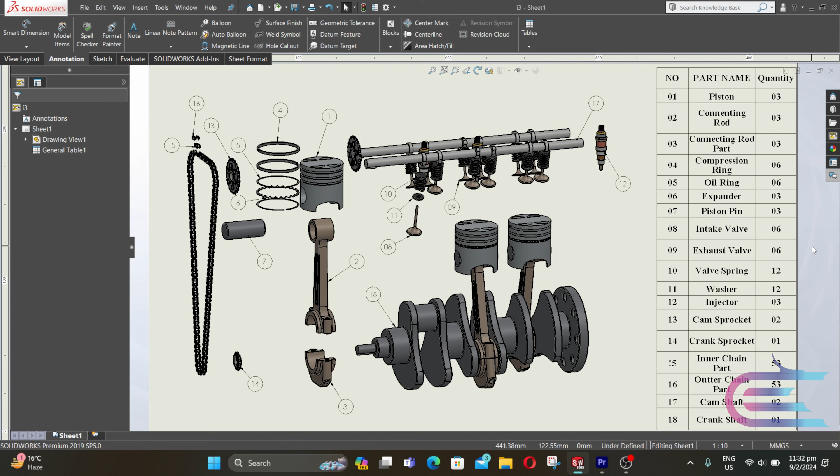Let's start. From File, select New, then select Assemble, then click OK. Select I3 crankshaft, then select Open. Place the crankshaft at the middle.

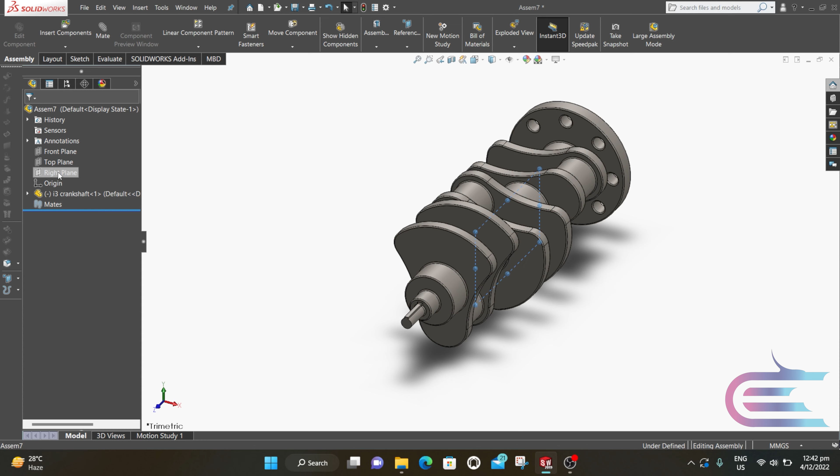Right-click over the body and select Float. Right-click over the right plane and select Normal to. Select Layout and select Center Line. Draw a vertical and horizontal center line connecting the origin point.

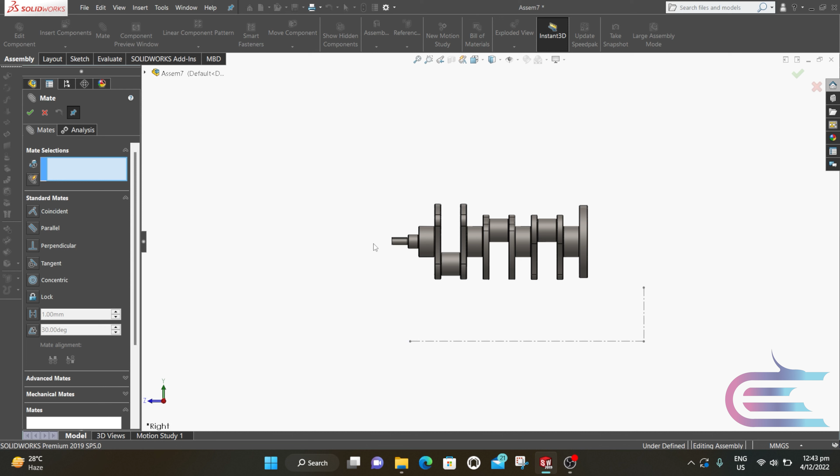Now exit the sketch. Go to Assemble and select Mate. Select this cylindrical profile and this line. Select Concentric, then click OK.

Now select this surface and this vertical center line. Select Coincident and click OK. Now this part can be rotated freely.

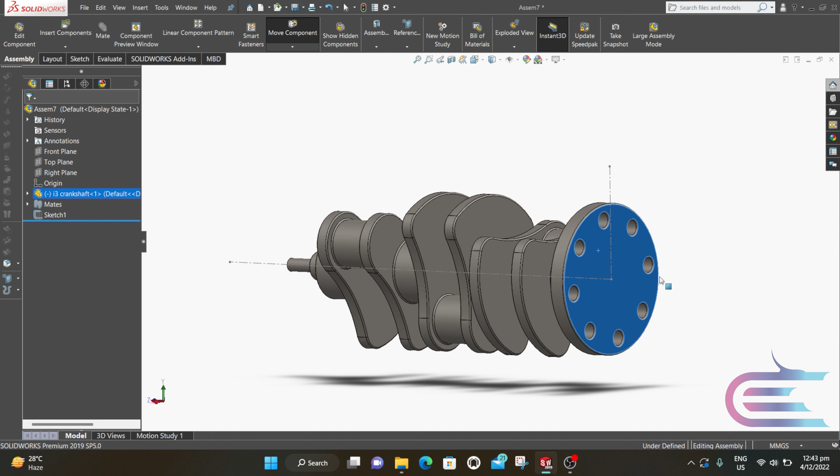Right click over right plane and select Normal to. Right click again and select Sketch. Now select Center Line. Put the cursor over this edge and the middle point will be shown. Draw a vertical line crossing the middle point till the previous horizontal line.

Similarly, create two more vertical center lines.

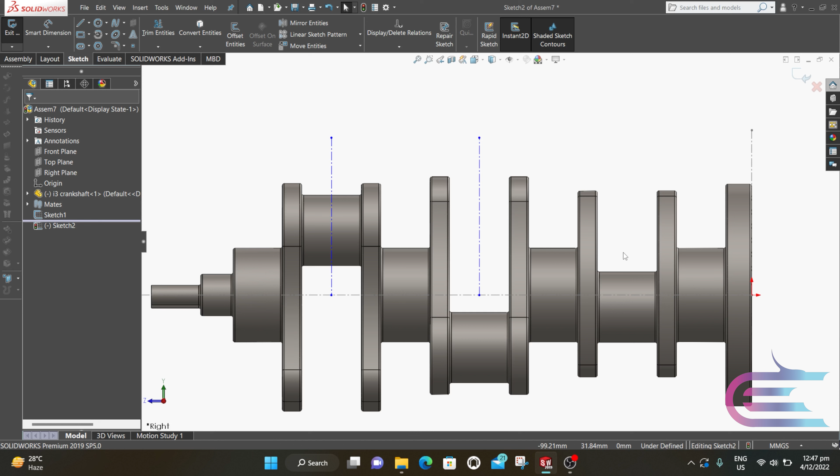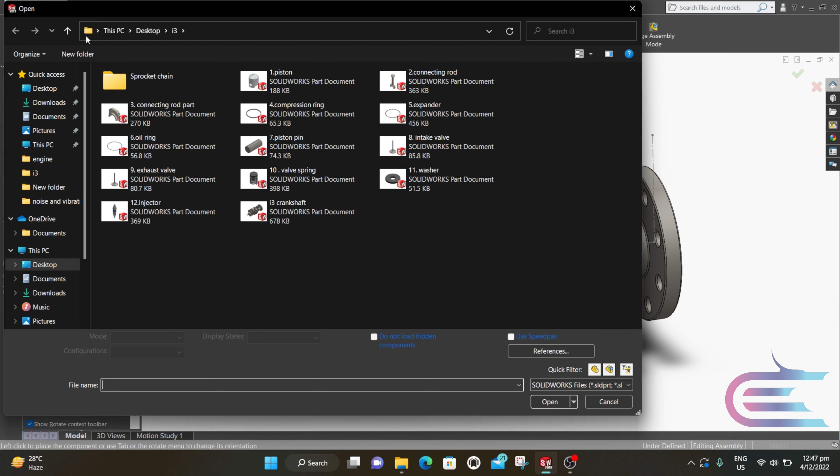Click on Insert Component and select the first 7 components. Click on Open. Now click the parts where you want to put it.

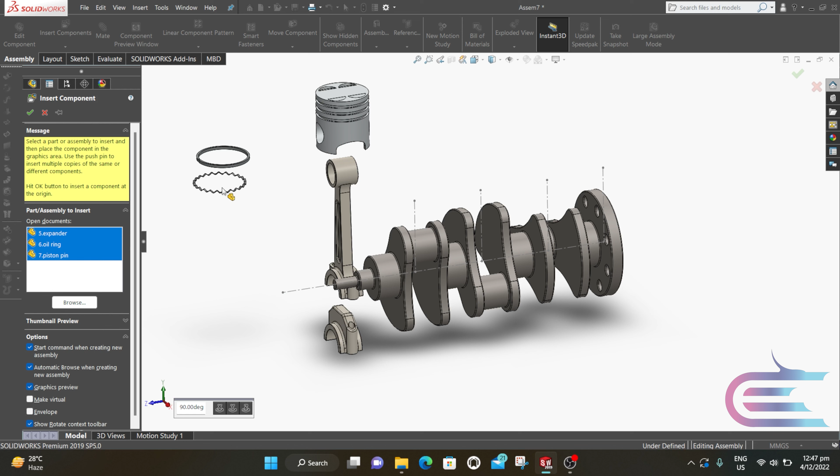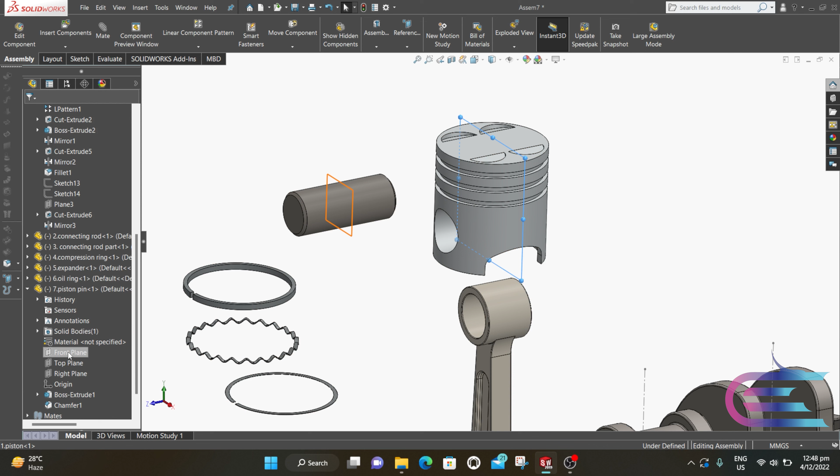Now press Ctrl and expand the piston. Select the front plane of the piston. Expand piston pin and select the front plane of the piston pin. Now click on Mate. Select Coincident and click OK.

Select this surface and this surface. Then select Concentric, then click OK.

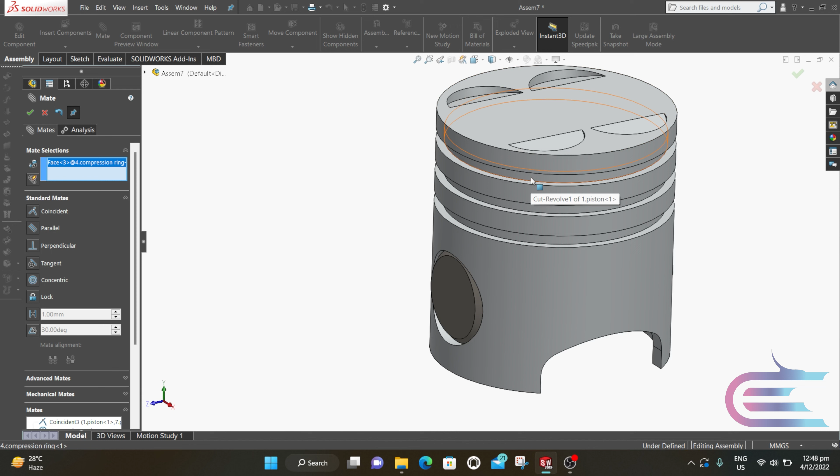Select this surface of the compression ring and this surface of the piston. Then select Concentric. Now select this surface and this surface. Select Coincident.

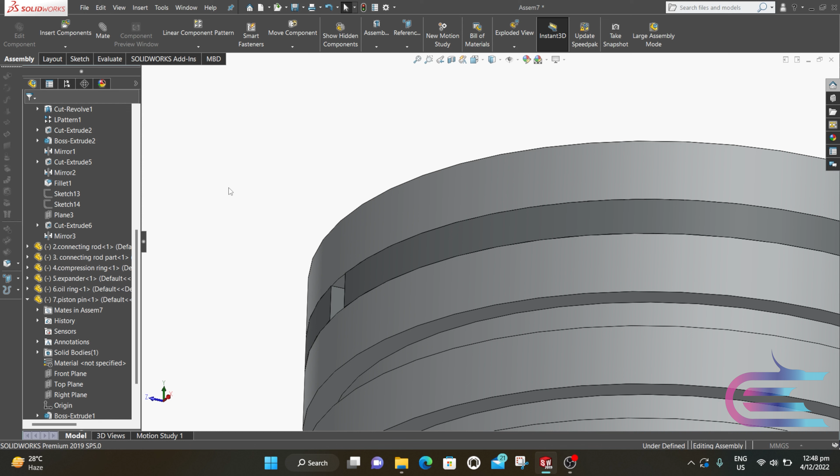Now select Insert Component and select Copy with Mates. Select the compression ring, then go to next. Select the cylindrical surface and then select the upper surface. Then click OK.

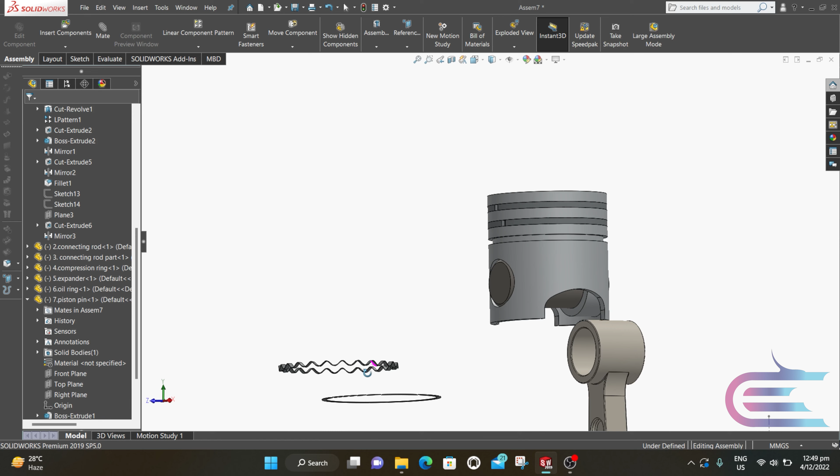Now select the cylindrical surface of the oil ring and the cylindrical pocket of the piston. Then select Mate. Lower the piston, then select this surface and this surface. Then click OK.

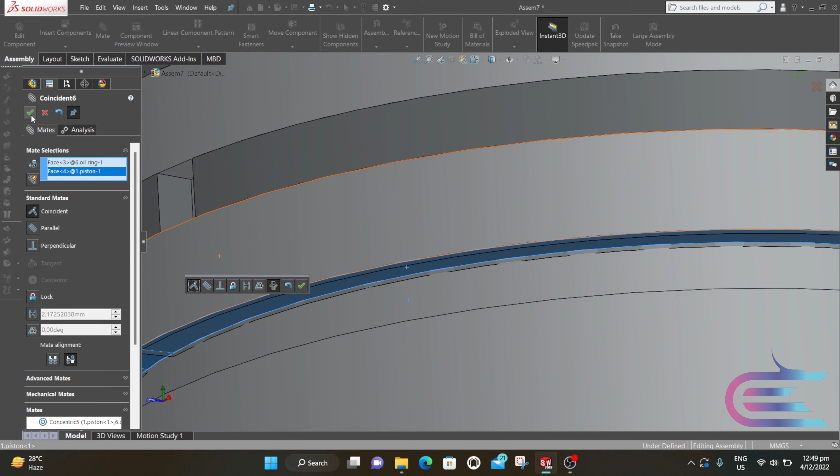Now select Copy with Mates and select the oil ring. Go to next. Select the cylindrical pocket and then select the lower surface of the pocket. Then click OK.

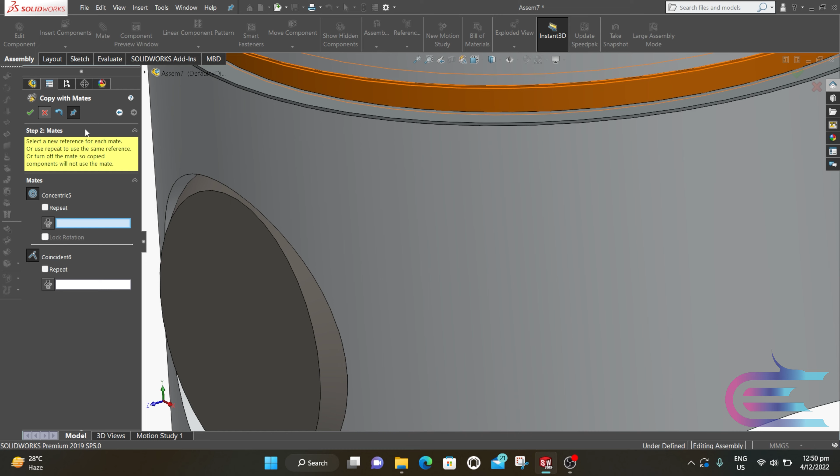Now select the circumferential surface of the expander and select the lower cylindrical pocket of the piston, then click on Mate. Select Concentric, then click OK.

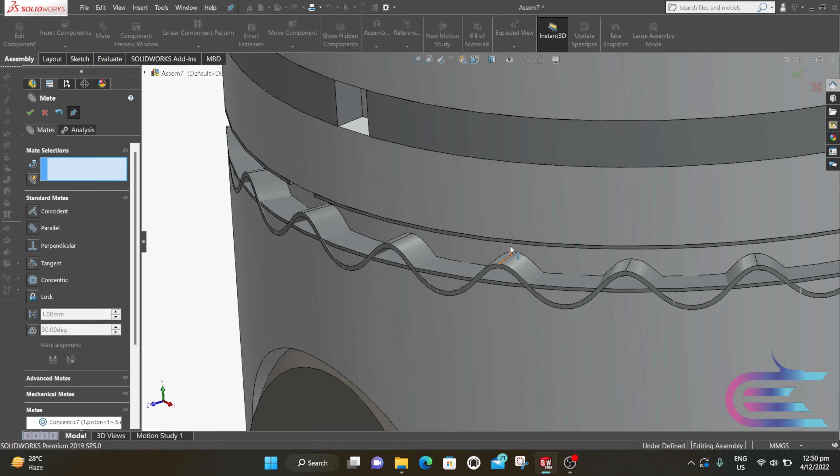Now lower the piston and select this edge of the expander and this surface of the oil ring. Then select Coincident and click OK.

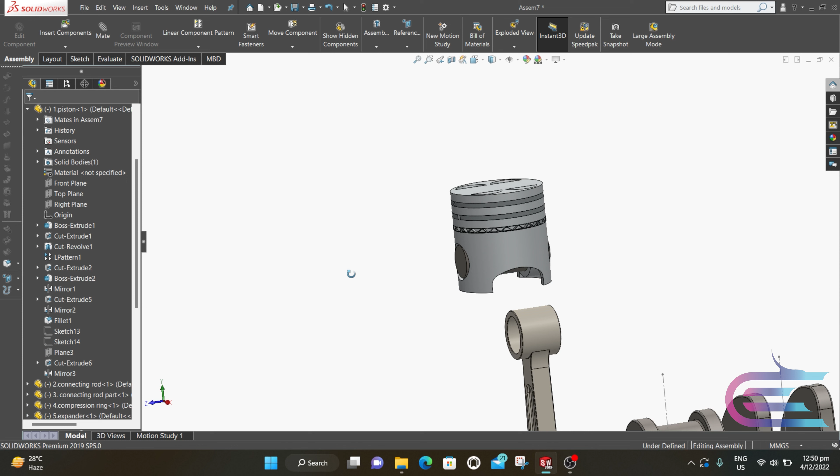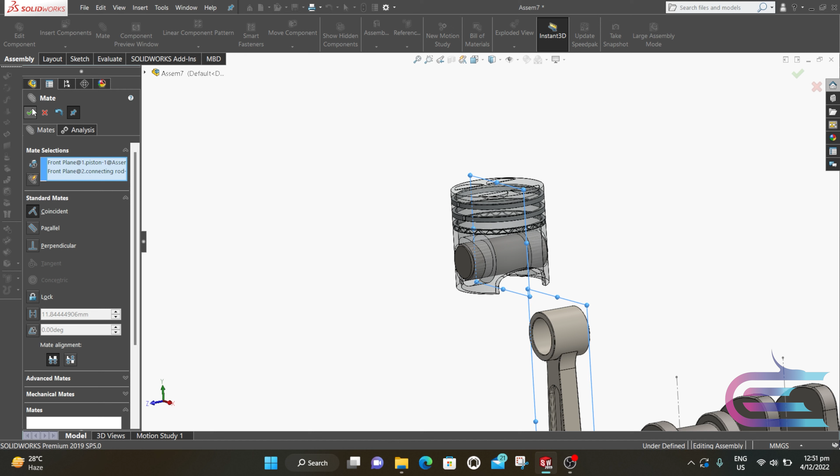Now press Ctrl and select the front plane of the piston. Expand connecting rod and, pressing Ctrl, select the front plane of the connecting rod. Then select Mate. Select Coincident and click OK.

Select this surface of the connecting rod and the outer surface of the piston pin. Then select Concentric, then click OK.

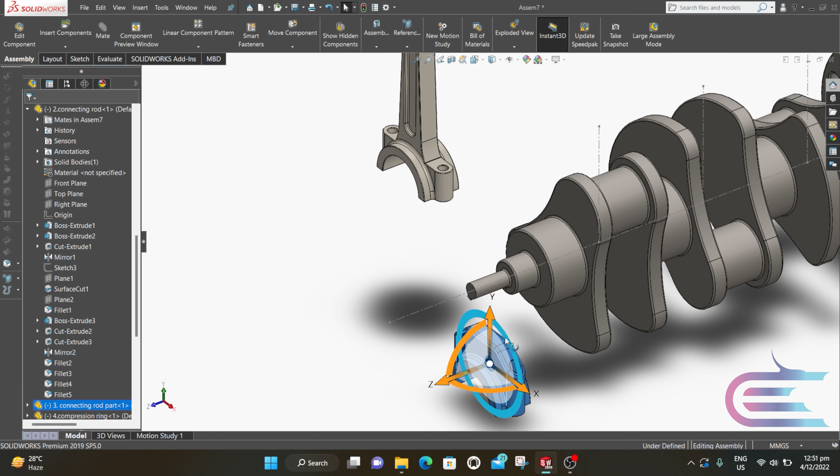Select this surface of the connecting rod part and click on Move with Triad. Then rotate this part. Press Ctrl and select this surface and this surface. Then click on Mate. Select Coincident, then click OK.

Select this hole and select this hole. Then select Coincident, then click OK. Repeat the same process for this side also. Then click OK.

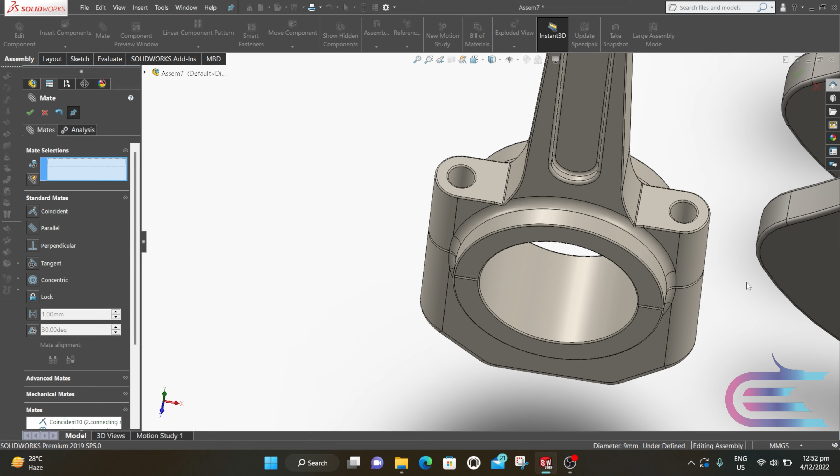Select this surface and this surface. Select Concentric, then click OK.

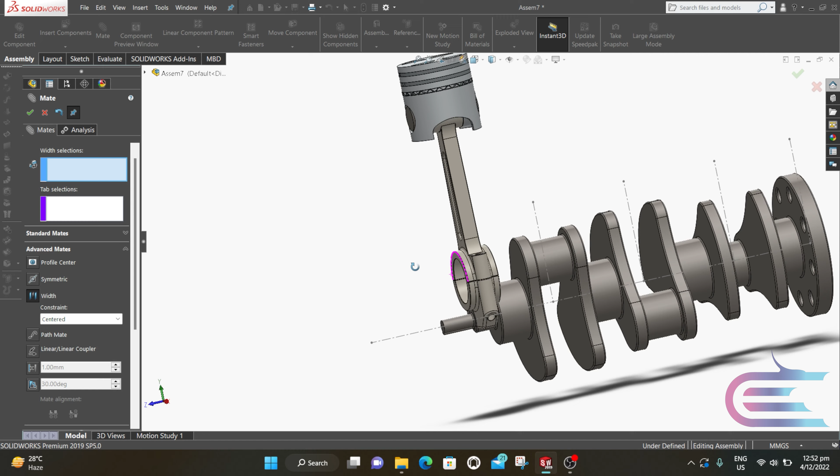Now go to Advanced Mate and click on Width. Now select this surface and this surface, and select this surface and this surface. So the connecting rod will be located in the middle of the crank faces. Then click OK.

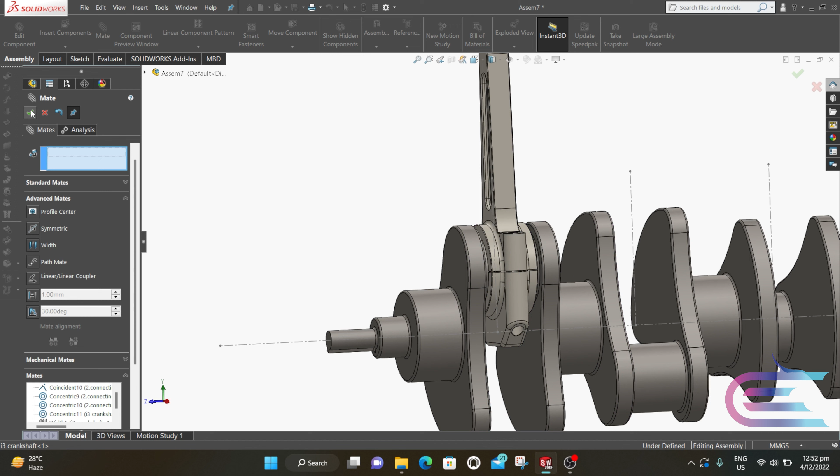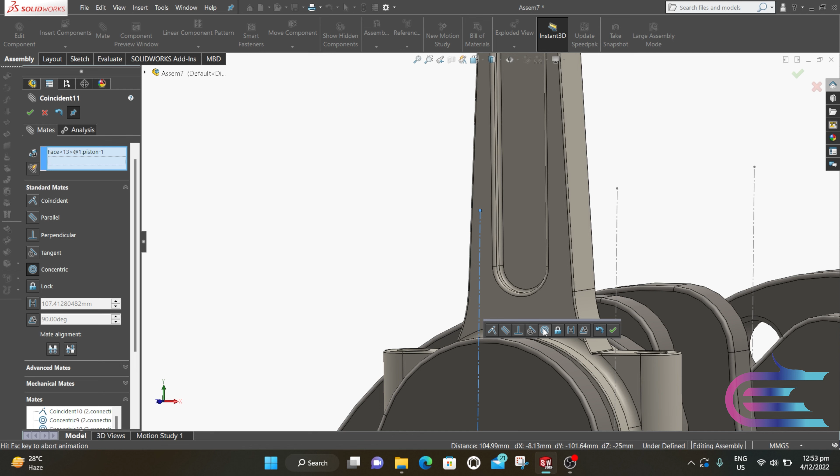Now expand Standard Mate. Now select the cylindrical surface of the piston and click on the vertical center line that we created before. And click on Concentric, then click OK.

Now rotate the crankshaft and you can see the piston is moving in reciprocating motion.

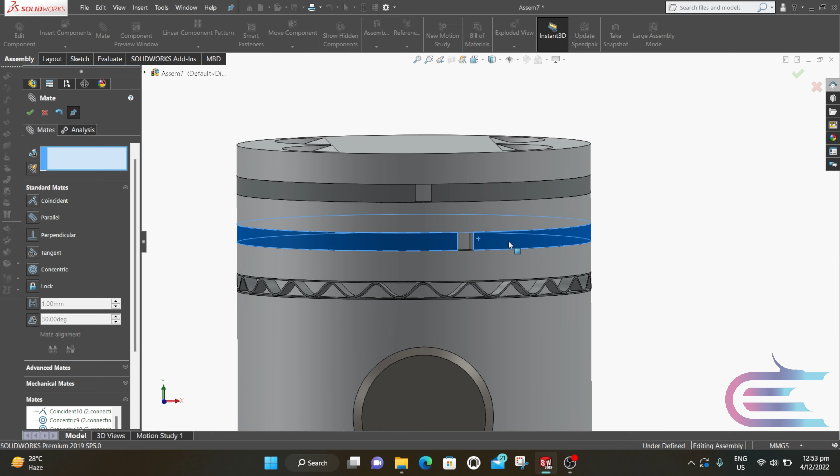Now we have to fix the compression rings and oil ring. These two gaps will be located at 180 degrees of each other, and the oil ring gap will be located at 90 degrees from the compression ring gap.

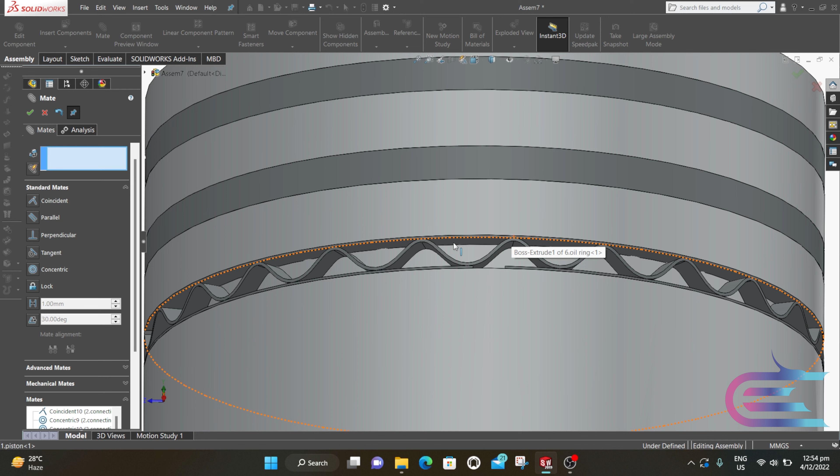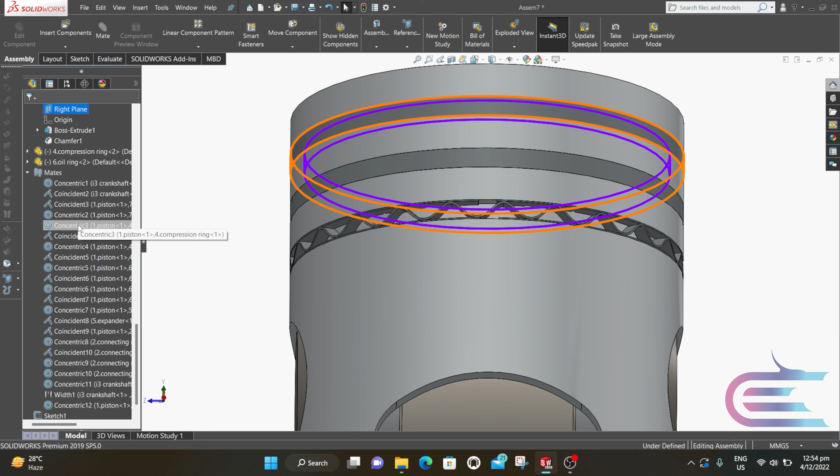Now the rotation of the rings should be stopped. So go to Mates and expand the mate. If you put the cursor over Concentric, it will show the relevant part with a different color. Right click over the Concentric, then select it. Here select Lock Rotation, then click OK. Similarly, we need to lock all of the rotation of the rings.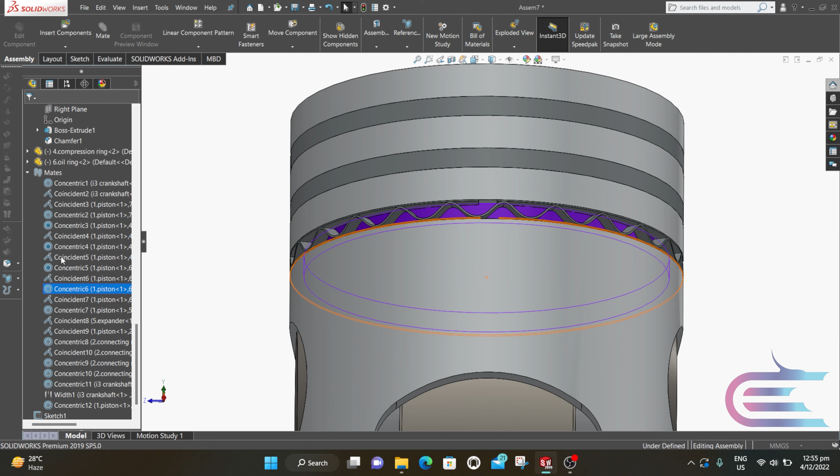Now see, the rotation is locked.

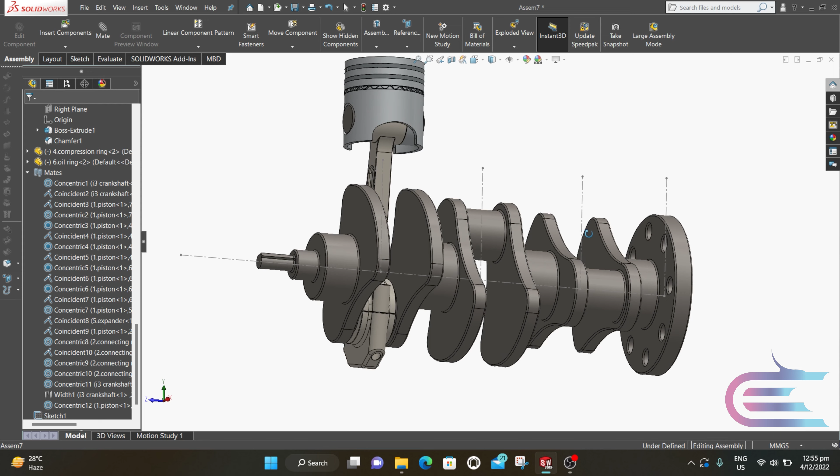Expand Insert Component and select Copy with Mates. Select all of these parts that we want to copy. Every selected part will be shown with blue color. Then click on Next.

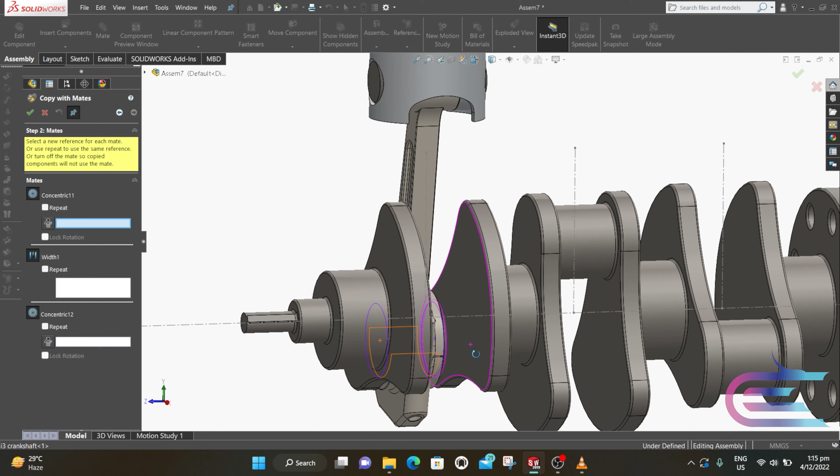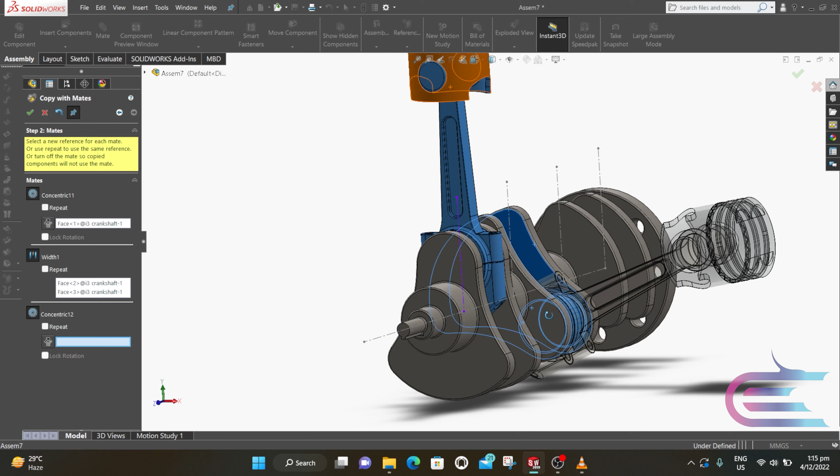Now at first it is asking about the concentric relation, which is shown with different color, so we have to select the relevant concentric. So select this surface. Now it is asking about width, which is shown with different color, so select these two surfaces as this is relevant. Now it is asking about the final concentric, which is the center line. Now select this center line.

Now this is unfortunately in the opposite direction, so we have to change the direction. Drag the piston and put it in the proper direction, so SolidWorks AI has an easy way to understand in which direction we want this.

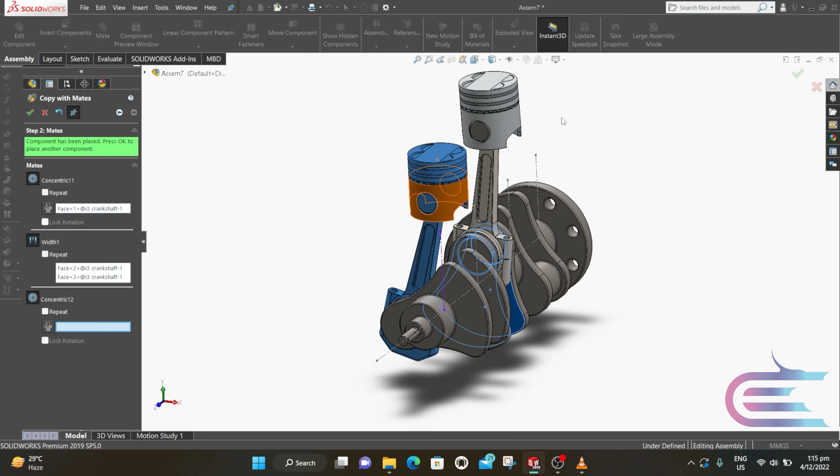And now select the vertical center line again. It is in opposite direction. Here change the direction. Now it is okay. Then click OK.

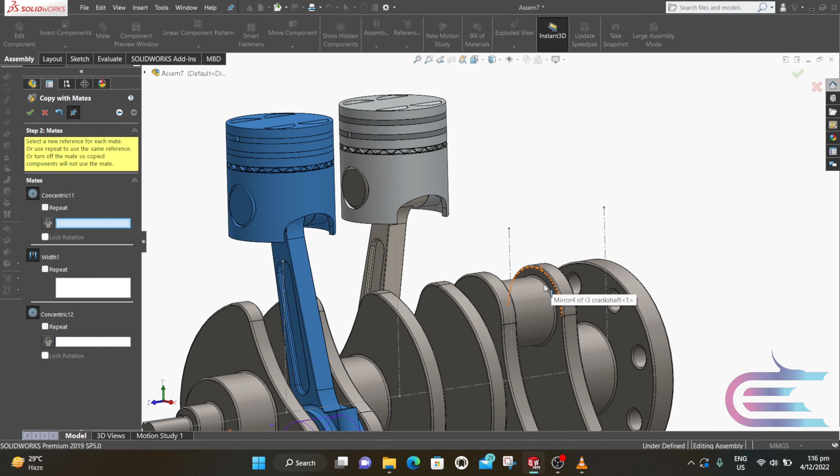Always try to rotate the crankshaft in the proper direction so you can avoid this type of scenario. Now repeat the process for the final piston.

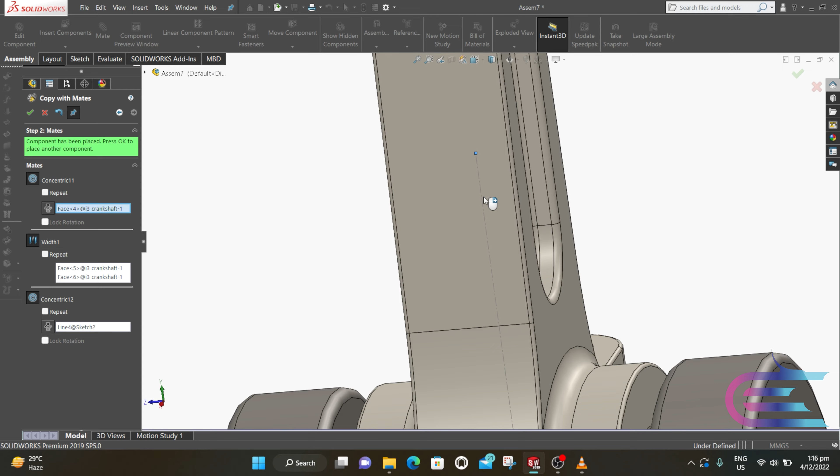Now rotate the crankshaft and check it. Now go to file and save it.